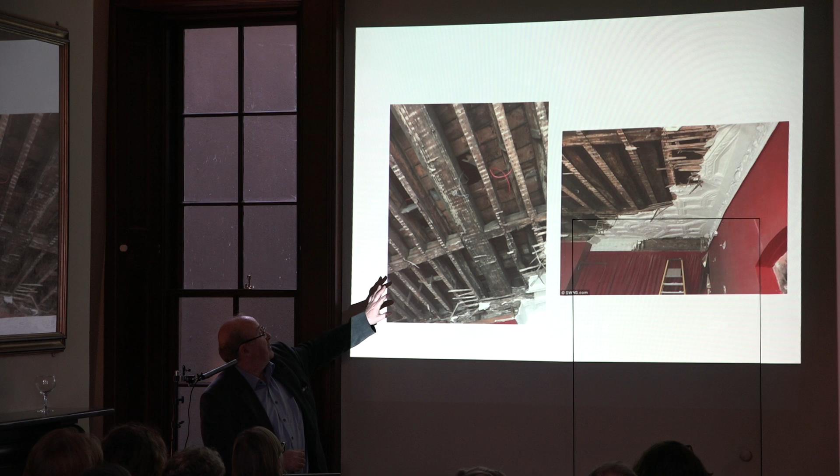But I just showed you the type of construction, which is on the slide on the left, which is what I'll be talking about, the major beams or breastsummers. The binder beams are, in this case you've got separate ceiling joists and floor joists, relating to the Dublin structures. Half timber. When did half timber begin and end? I didn't know. I have the answer now.

These are the last half-timbered structures to be built in Britain, and they were built in the 1650s in Newcastle. And there's a complete terrace. Even the houses with brick fronts were originally half-timbered as well, in Sandhill in Newcastle.

And the reason why they're half-timbered, and I finally got the article yesterday to look it up in Trinity electronically, is that the people who built them were all Puritans, and they regarded what Inigo Jones had been doing for the monarchs as royalist, and they were Puritans because Newcastle was tied with Cromwell. So when they redeveloped this area, and they were all members of the same Puritan sect, they redeveloped it as half-timbered houses. One of them is 1657.

This one on the right-hand side was restored by the later Viscount Gort, and in the 1930s he put all his own furniture into it, which is all now in Bunratty. He must have had a row with people in Newcastle subsequently. But anyway, if you look up that website, half-timbered houses, cagework house, Peter's already covered that.

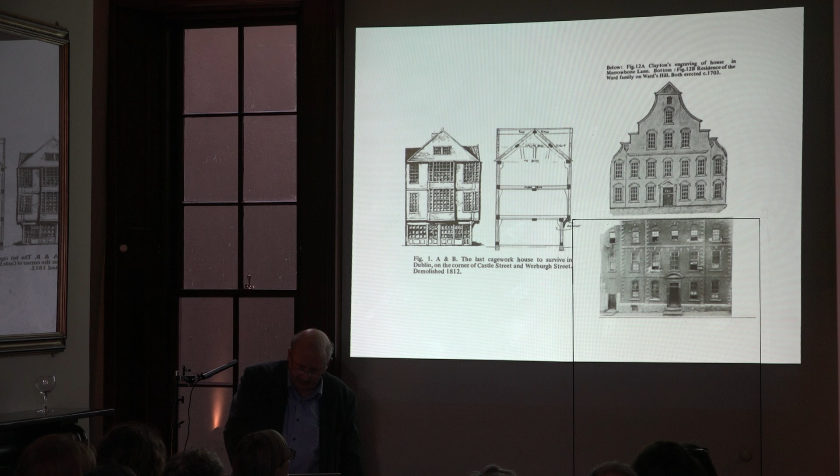Curvilinear gables, this is from Peter Walsh's book on the right-hand side. You had different types, one with a flat top, one with a curvilinear top, and then you had mansions. I think somebody showed one earlier, which was Lord Clancarty's mansion in College Green. This is one in Molesworth Street on the left, similar to what was Tervey House, with the gables filled in. So in other words, people were still, even wealthy people, putting gables on houses.

But on the other hand, there was a separate style in operation. On the left is Belvedere, now part of St Patrick's Training College, which I first visited with Geraldine Stout, who was here many years ago, and who got me into it. And it's 1680s, so it's obviously not in a gable style, it's the classical style. But the roof was changed in the 1720s and was probably more like the house on the right, which is Eltham Lodge of the 1660s outside London.

And these are the interiors, and this is the panelling of Belvedere, which is 17th century. I think it's the only complete 17th century panelling in Dublin, and you can see the beam. The most important house probably of the period was also the 1680s, and we don't know what it looked like. It was Speaker Conolly's house, which he bought, but we don't know who he bought it from. It was built in the 1680s.

It was replaced in the 1770s by a row of buildings, and one of them was demolished, and the only trace we could find, in fact, was an imprint of all the quoin stones on the adjoining building, which was built later.

On the right-hand side then, you can see the corner of Riders Row. When I was researching this in the 1990s, Mary Clark was able to produce deeds for houses in Capel Street and Riders Row, which were 1680, '88, and when we eventually got into those, with Leicester Roach, we discovered that they had 17th century interiors. Unfortunately, at that stage they'd got into a dangerous condition, and after we took the slides, these are Nessa's slides, the building went on fire one weekend and it was all lost. This is the only record of the interior.

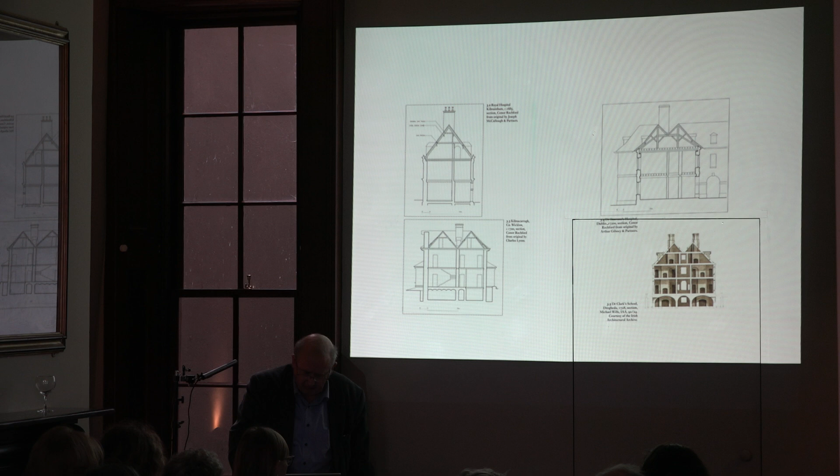Gabled houses. If you Google gabled houses, you don't find Dublin. Dutch gables. You Google Dutch gables in Wikipedia, this is what you get, which is Arras in France, which is a marvellous ensemble in two squares, damaged in the First World War. Interesting though, because this slide actually shows you, after shell fire, when the front walls collapse, you can actually see the construction. And the reason why the houses were this width, and presumably the reason why burgage plots were the width they are, is that is the width that an oak beam could span. And if you look on the right hand slide, you can actually see an enlargement of that with the beams, and you can see the mortises and the beams.

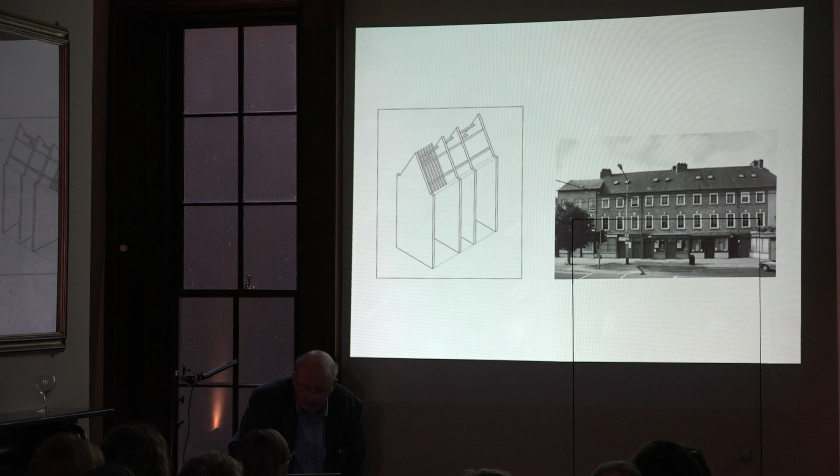Some of them, roof timbers had purlins. 18th century, the type of timbers you come in are more vertical timbers. But on the other hand, you have a combination. This is Lombardstown House, which burnt in 2012, which we were assured was 18th century, but yet there were beams of an earlier period, and you can see the 17th century house hidden behind it. And to go on to Aungier Street then, this is really the greatest concentration. We first registered number 21 in 1992. Subsequently, after UCD students had done a survey, they found more, and we registered those later on.

So there's 9, 10, 20, 19 and 20 and 21 are registered monuments. Peter's covered these already. These are, I think, early 18th century Aungier Street interventions. But then, this is important because the photo slide on the right, taken by Aidan Lumley of Aungier Street, sent to the OPW, where we were at the time, said that he'd taken this photograph of number 21, and it was the same as the Georgian Society earlier.

And on that basis, we both appealed the planning permission granted by DCC, respecting the building, to the board, and it was registered as a monument. So that was the first one to be registered. That's it on the left, as restored by Dublin Civic Trust. On the right, 19 to 20, which Richard McLaughlin is working on. Richard's given me some slides showing the construction. You can see the big beams and small joists.

9 and 9A, 10 and 10A, all registered in the 1990s. 9 and 9A was the subject of Tom's slides, and we'll come to that in a minute. On 10 and 10A, there was a lot of work done in the 1990s, and these are the backs, and I'll just show you a detail of 10 and 10A from slides I took 20 years ago, where it actually had a pair of pilasters, and this is just my scale on some of the cornice work, which was timber.

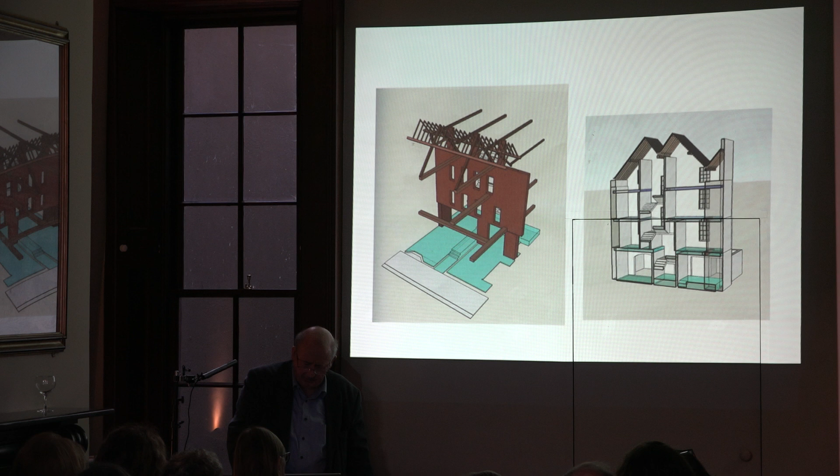And Tom's sections showing how these were brick buildings built really like what Inigo Jones was doing in the 1630s. In other words, this is after the restoration in 1660. When people started rebuilding both in London and Dublin, they wanted to go back to what they were doing in the 1630s and build uniform linear streets with gables with ridges parallel to the street. So this is why Aungier Street is not a gabled street. It's going back to a street pattern which had been started by Jones before Cromwell's time.

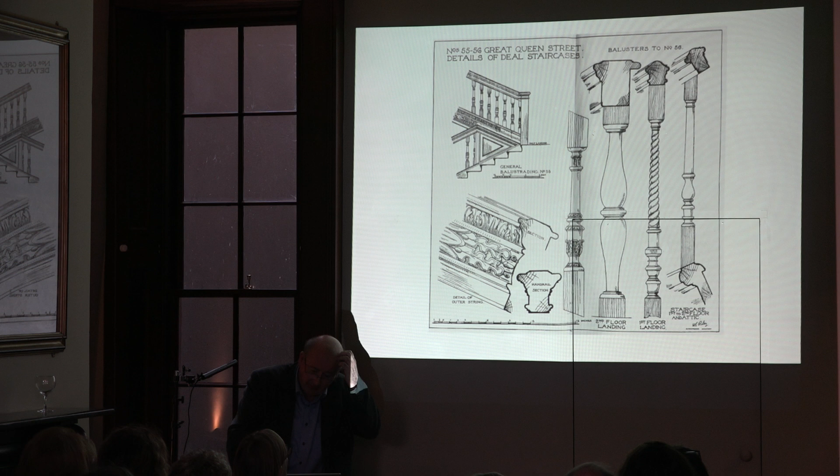Thank you, Freddie. That was amazing. Bang on the button. Our next speaker is David Averill. He is a director at Sheehan & Barry Architects, Grade 1 Conservation Architects. And he has been working with Sheehan and Barry since late 1986. He's worked on a number of significant conservation projects such as Newman House, 85, 86 St Stephen's Green, Dublin 2, Giltown Stud, County Kildare, 8 Stephen's Green, 58 Merrion Square, Rusborough House in County Wicklow, Lambay Island, and numerous other large and small projects during his time at Sheehan & Barry.

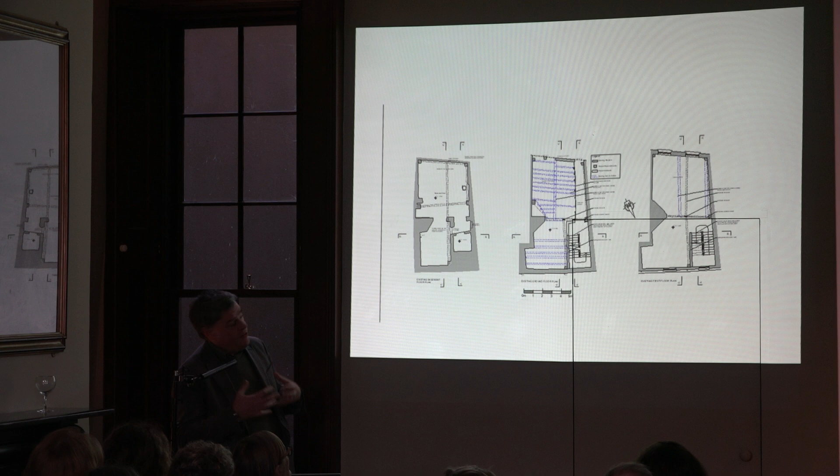So our first job was really to try and make the building safe. Initially Paul engaged his regular engineer, Robert McGrath from Pat O'Gorman and Associates. Robert went in with a view to try and stabilise the building and prop it. He did that by evolving a system of propping that Paul could use safely and make the building safe, which allowed us to go in.

It started off with my colleague Shane O'Connor and myself going in to survey all the joinery. The blue is the surviving timbers that we identified as we went up the building. There was more surviving on the ground floor. There were layers and layers of detritus. The building had been used as a kind of fly tip from above by neighbouring properties.

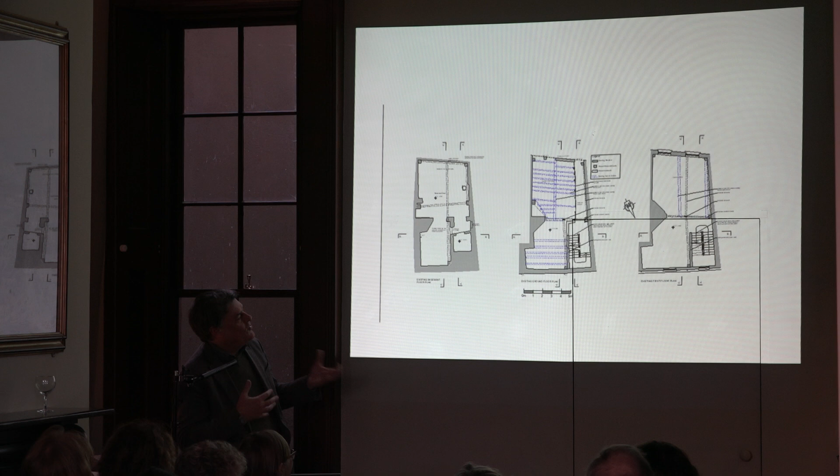So we had mattresses, and then a lot of the actual areas of interest were hidden behind beauty board. The building had been a shop, and everything was covered in beauty board. Beauty board is the least beautiful thing that you can find. But anyway, Paul carefully stripped that away, and it allowed us to make those assessments.

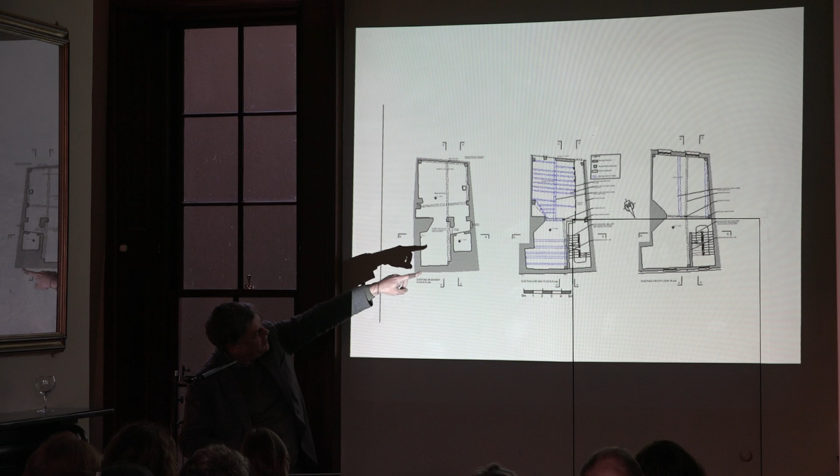As you can see, it's an interesting plan. This is the ground floor here, where the shop was, at basement level, and then that's at the entry level there. The corner fireplace had been lost at the front, but it was essentially your typical corner fireplace, two-room with a staircase, and then an interesting roof form.

It had a kind of a roof and a half at the back, and we quickly could identify by looking at the top floor that it probably was a dormered building originally, with an extra floor added and a parapet put in, because we could see the remnants of the pathway of the old roof.

So now the roof had been replaced. The very derelict roof you saw in the earlier slide had been replaced. It was all modern cut timbers. It was severely deteriorated, so it wasn't a difficult decision to remove it, but to reinstate it as found. In a sense, we rebuilt the form as found, but with a modern roof.

What Paul was able to do then was to support the building, and Robert and we had to look at what we were dealing with. So it was a kind of structural strategy that we had to adapt and come up with. And I would say that every building that you meet is going to tell a different story, and it's going to suggest different things to you.

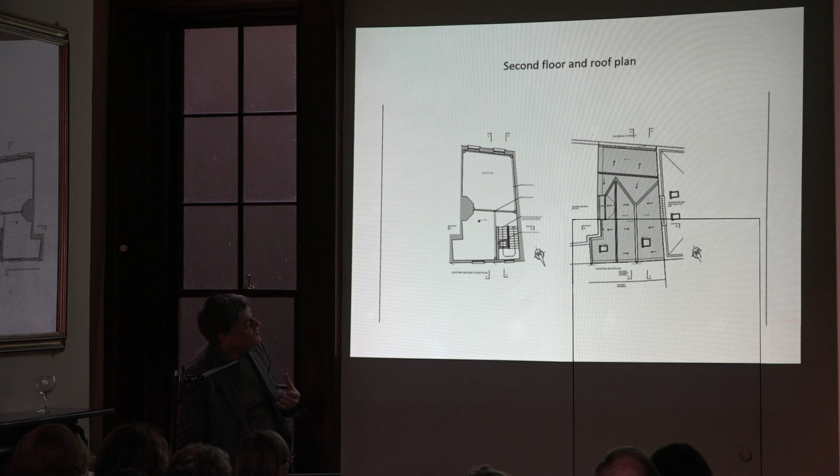This house had gone so far structurally that there was very little viability in any of the structural elements, the floors, the joists, the walls. So we had to make a decision: how do we bring this building forward in a way that keeps as much original material as possible? So Robert came up with a very simple system of basically a steel frame that would be inserted into the building, which would allow the building to be supported and allow us the time then to assess what we were dealing with.

So it was an approach that we would build a semi-permanent steel frame. The steel frame was more complex at the start. It had struts which were designed to be removed as the building became more stable, but we were still working on the basis that we would build a permanent steel frame, because the level of fragility of the surviving fabric was such that if we started to dismantle it, and some of it had already collapsed, we were going to be involved essentially in a reconstruction, which was going to lose some of the essence of the building as it was. So the steel frame gave us the flexibility to retain as much original material as possible.

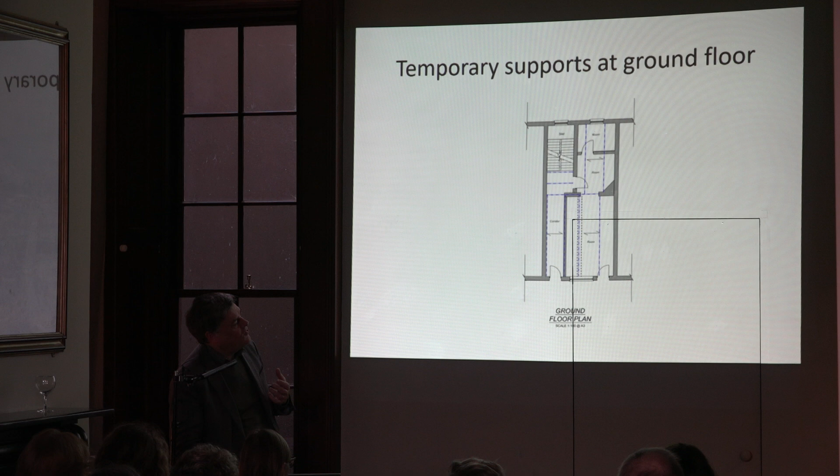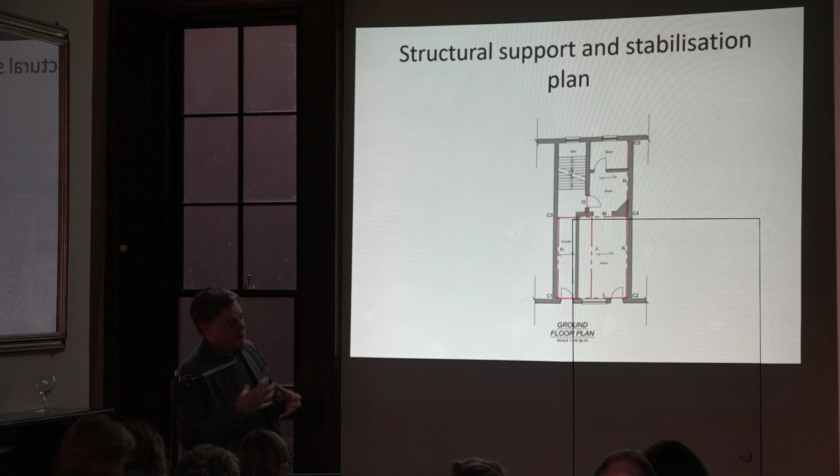That is the ground floor plan. There was a partition across the back, but actually it was modern. And there was a funny little nook, which doesn't show on that plan, that went into the neighbouring building. We were able to find from blocked up openings that ownership had changed over the years, and this building had been part of neighbouring buildings and connected to them, then blocked up again and then opened up again. So periods of different ownership had provided for a different kind of connectivity between its neighbours.

So this is where we were on the ground floor once the steel frame design was worked out. I have to say that all along this process we were very much working with the City Council, with Nicky's support and Carl Raftery and everybody else in the City Council. It was a collaborative journey, and doing this kind of project is incredibly collaborative, as I'm sure all of you know. You end up working with so many different people who are bringing so many different skills to the table.

Paul was a brilliant client, and I think it's so important that you have a client who's sympathetic to the building. Paul came from a joinery background before he was a main contractor, so he was very interested in the joinery of the building. And he was able to say, I know what I'm dealing with now, and to give us the space with the support of the council. The council was very supportive in encouraging us to go for specific grant aid as well, and that gave Paul a little bit of room financially to allow the building the time to be explored and developed in an appropriate way.

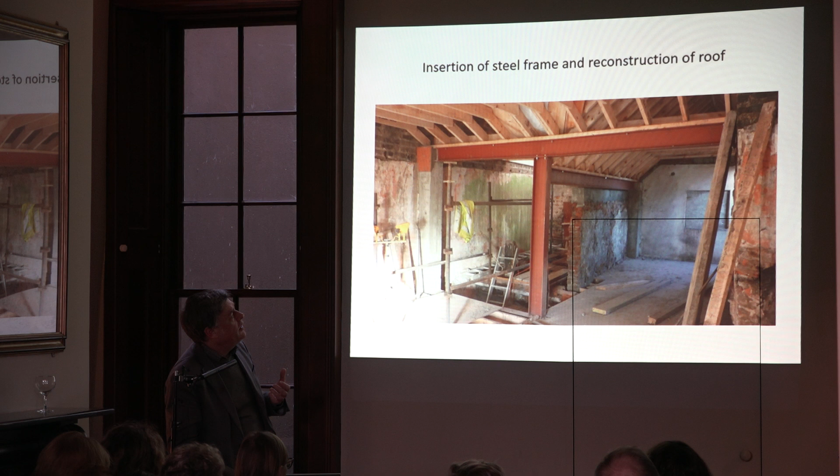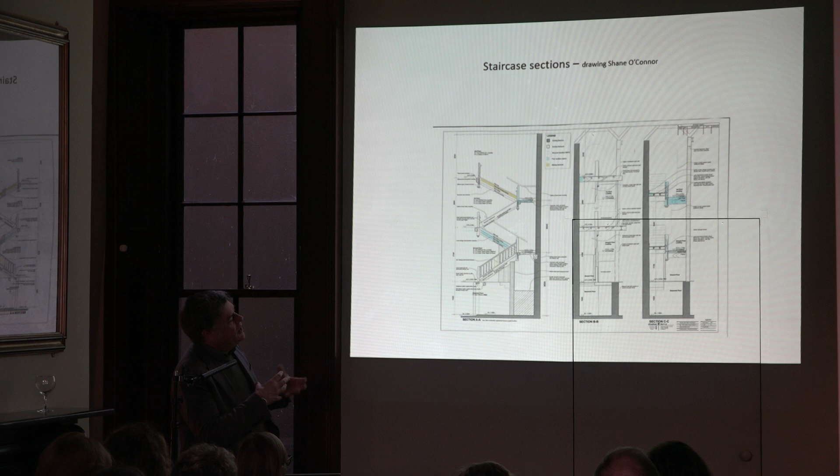So we did sections through the staircase. We categorized what was original, what was lost, and that was a very interesting process, just looking at what we had, and then working with a specialist joiner, Pat Lynch from McGlynn Joinery, who Paul had worked with before, and then starting to develop a strategy for restoration of the staircase in a way that was going to bring back the character of the staircase.

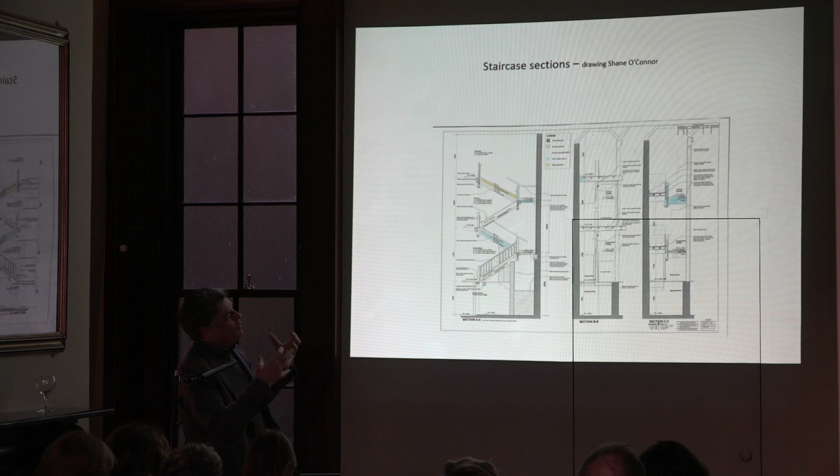See how I'm doing. So there we were in a situation which was unusual in that all the non-viable structural elements had deflected and settled. So we were able to put in a new floor which was actually to the correct level, but the surviving elements had deflected so much that there was no possibility that we were going to be able to reuse them anyway. The joist ends had rotted quite badly in most cases, but everything was recorded very carefully, and then we were able, once the floor above had been inserted, to place the timbers back from recording exactly where they had been found.

This was a point where Robert stood back from the project because he was moving from one practice to another, so it was an opportunity when we worked with Lisa Eden, and we knew Lisa's work in Aungier Street and her particular experience and skills with buildings of this period.

So we were able to engage with Lisa, who was a fantastic partner on the project and somebody who has such knowledge and appropriate sympathy for a building of this period. So we were able then to evolve ways and strategies that the surviving timbers could be presented in such a way that they were seen as found, and if they were stabilised and presented, they were presented in a clean, clear way. And you'll see in some of the later slides that Lisa evolved very simple ways of just hanging

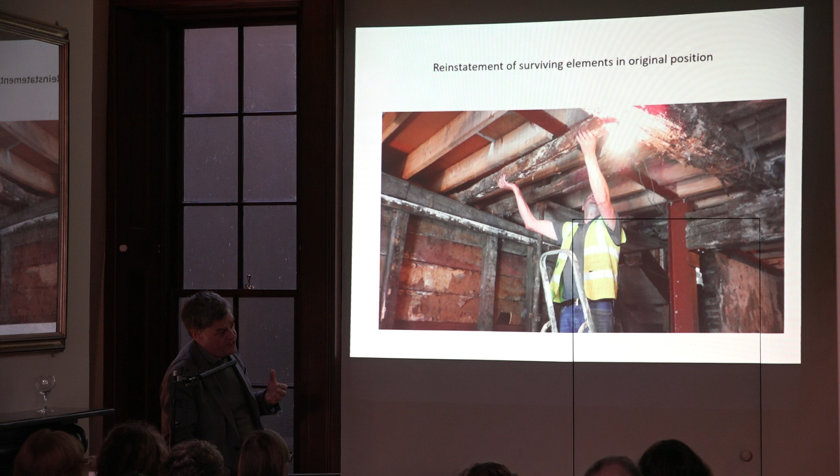separation and compliance. But what we did introduce was fire separation between the ground and first floors, for which we used the Lamatherm system, which is a very simple system for inserting between joists. And it gives you the flexibility to work with separating floors in a way that respects and can maintain as much fabric as possible. So this is Lisa's very simple approach to where we had surviving timbers, that they were just essentially presented and held in position in a very simple and clean way. And then you can see the new floor went in then above the deflected original floor.

We had a very interesting combination of brickwork that surrounded the staircase. And we were fortunate to get advice from Susan Rowntree, who came to the site and met with my colleague Shane O'Connor and started to identify the layers and cumulative changes to the building, identifying the fact that there was early brickwork. The thinner early bricks were concentrated in the party walls. And as you went up the building, you began to see more intervention from later rebuilds, later larger bricks being evident.

So here we are surveying the staircase, marking with chalk every single element of the staircase. And one of the big surprises we discovered was at the front, the riser was a kind of a moulded riser. And that was a very interesting thing because buildings of this age had a certain architectural ambition, even though they were quite modest buildings. But we were able to correlate these buildings with other buildings where timber staircases aped the architectural detailing of stone staircases. And we were able to even discover a 17th century hammerhead hidden behind one of the

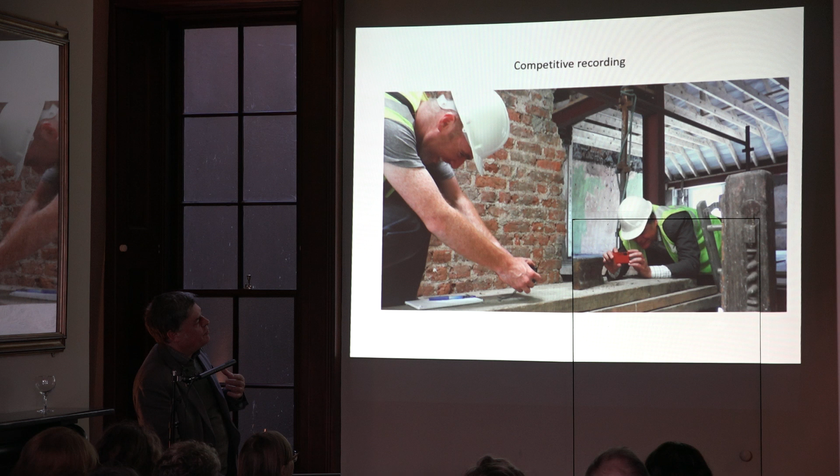It's what we call competitive recording. That was Lisa Eden taking a picture of Shane and myself. Shane and then my other colleague, Niamh Kiernan, came on board after Shane went back to Waterford, where he was from, and we worked together on the project, and I think it was a very useful and interesting collaboration.

Here we were testing the cleaning process for the timber. What we wanted to do was just basically to do a very light surface clean using chalk and looking at different densities and different levels of cleaning to try and establish the best and most appropriate way of taking away the surface dirt, but essentially consolidating and leaving what we found as much as possible.

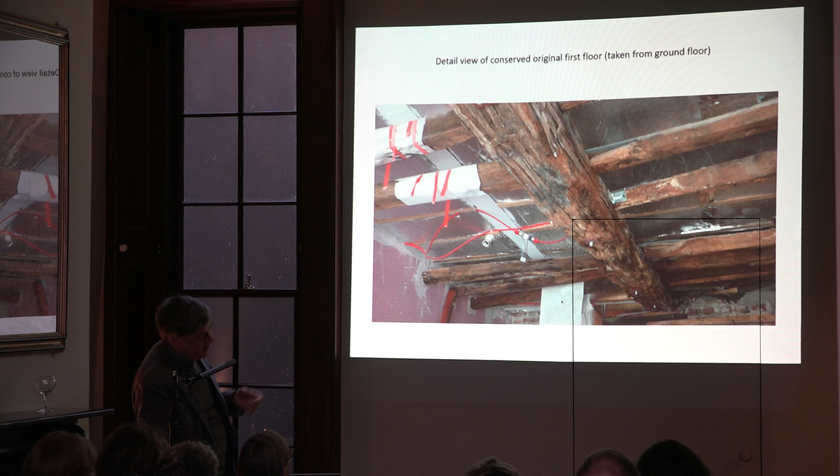You can see the Lamatherm system has been inserted. Again, we were lucky that Declan Crilly of FEAC had a very good relationship with the fire officer. So he was able to negotiate a very sympathetic approach in terms of fire treatment.

Here's Pat's work in reinstating the treads on the staircase, and where it was lost, he remolded the molded frontispiece to the riser. And then here we are further up the building where Pat had inserted new balusters and new handrails. The newel posts had survived, very simple, chunky newel posts with little mouldings top and bottom, possibly a little altered a bit later, but surviving. And then it enabled us to reinstate the entire staircase from ground to top floor.

We used a Canadian pine, which we established was probably the best. But what was interesting from the dendrochronological information was that there was a variety of timbers. There was oak as well as pine used in the building. But the testing allowed us to consolidate a date towards 1640. The majority of the tests suggested a date for the staircase of 1640, although we did find a 15th century timber there as well. So again, it speaks to the fact that timbers were reused, and there was a bit of creative reuse going on then in terms of sustainability in its 17th century form.

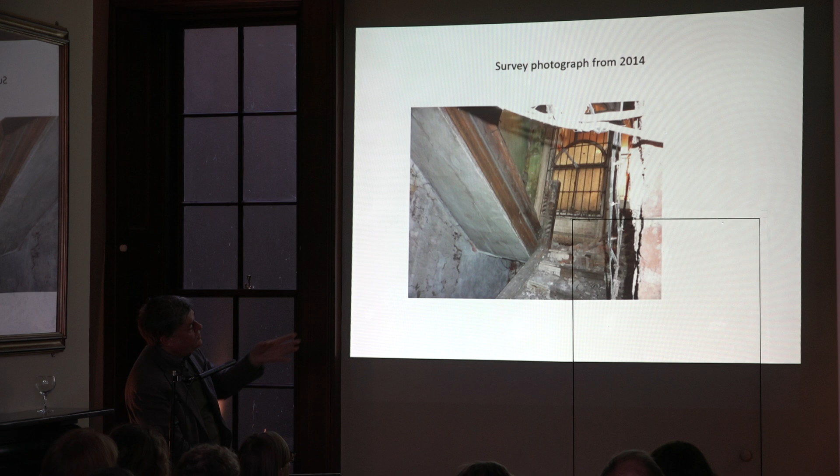Here we are again. This is the most intact original section. We only had to reinstate one missing baluster. So then the building found a new life. This is the view of the staircase. There was a sort of early 19th century treatment of the half landing window, but most of the staircase had been lost, and this is after the reinstatement work.

Lisa did great work in stabilizing the staircase and allowing the maximum reuse of the original structure. But obviously it was in a perilous condition, and Lisa's work was very valuable in terms of designing a way of treating it. This is the entry corridor with the planked partition reinstated, but obviously we had to insert a fire wall between that and the new shop to provide for fire separation.

And then this is the interior of the apartment on the first floor. There's Paul's little display cabinet for the artifacts found on the site. We've got some very nice old salvage boards for the floors, and you can see the corner fireplace. We've exposed the principal timbers, and I think the building has been allowed to have a viable function.

This is an exposed section of the staircase brickwork. As you can see, a variety of repairs, a variety of shapes and sizes. Quite a crude level of construction, but a fascinating accumulation. And here's another view, this time on the top floor. Again, trying to leave remnants of the structure and heritage of the building exposed for the owners to enjoy. And little remnants exposed in the building.

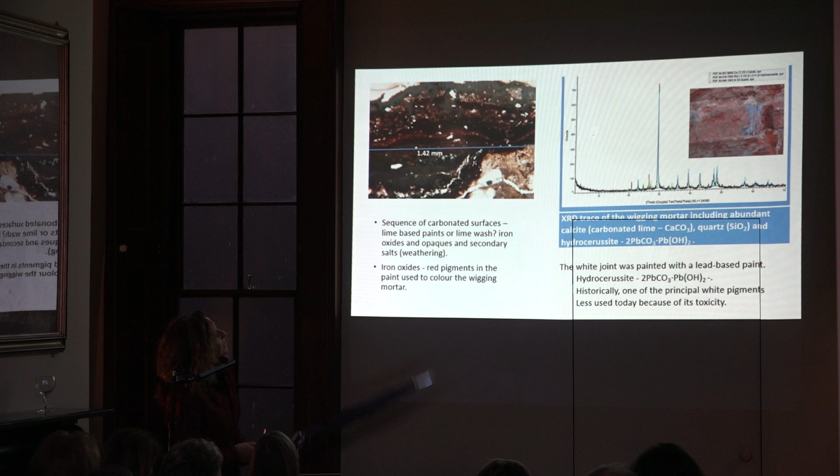So what else did we find in the wigging? Oh yeah, there was a sequence of surfaces, in some places at least 3, and they were just carbonated surfaces. I don't know whether they were lime-based paints or maybe lime washes. What was clear is that the wigging mortars were painted with some iron-based paint. So there were a lot of oxides.

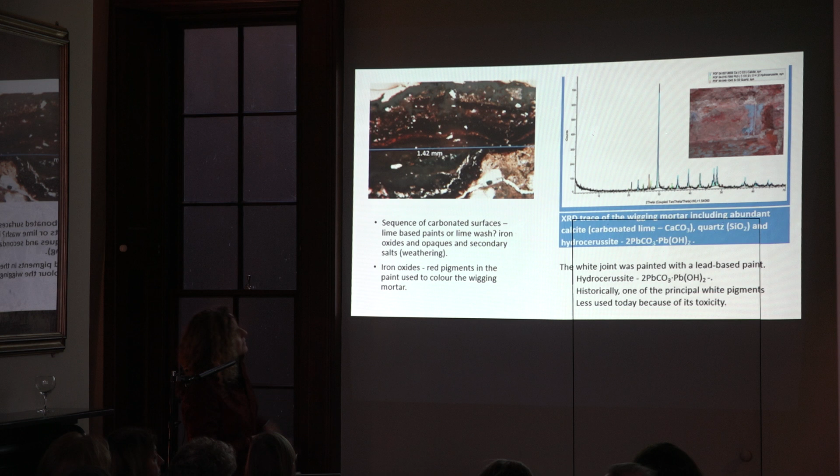You can see the red, and if you look at even a higher magnification, there were a lot of crystals of oxides on these coatings.

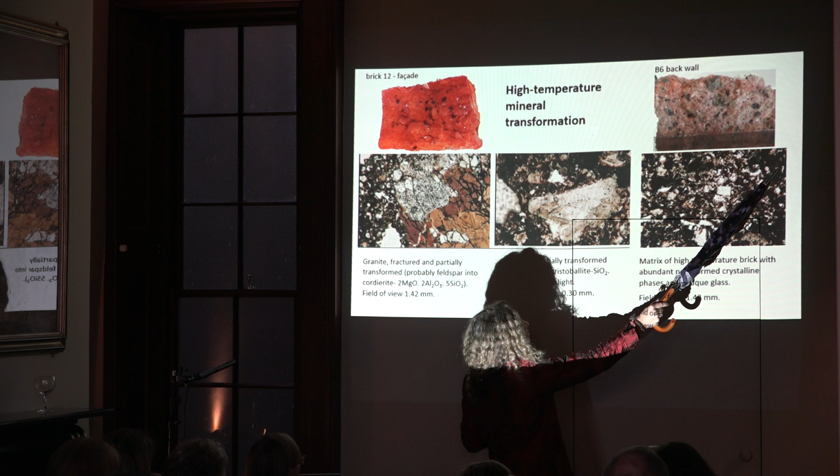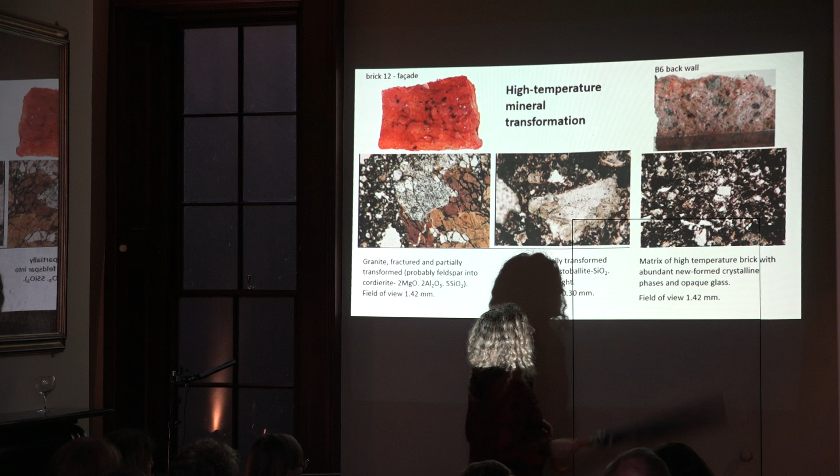So in these high temperature bricks, the matrices were typically very black. All this black stuff is glass. It has no crystalline structure, so in the microscope it looks completely black. And also some newly formed crystals. All these wiggly crystals, wiggly phases, were newly formed during firing. So that was a typical matrix of some of these high temperature bricks.

At lower magnification, you could see that alternation: areas of opaque glass alternating with less glassy areas, with more new formation. You could see the fragments of limestone sometimes, some other times granites or sandstones in there, residual. And we could see that micas were breaking down and being transformed into glass, meaning that the temperature has to be more than 1050 degrees Celsius for the micas to break down like that.

The petrographic microscope will give us two-dimensional pictures of the material at not very high magnifications. You can see the scales in the previous pictures. But the SEM, scanning electron microscope, will give us a three-dimensional black and white picture at much higher magnification. But really what we could see was very much the same thing as with the petrographic microscope. Only we could see the glass much better, and we could take the composition of the glass.

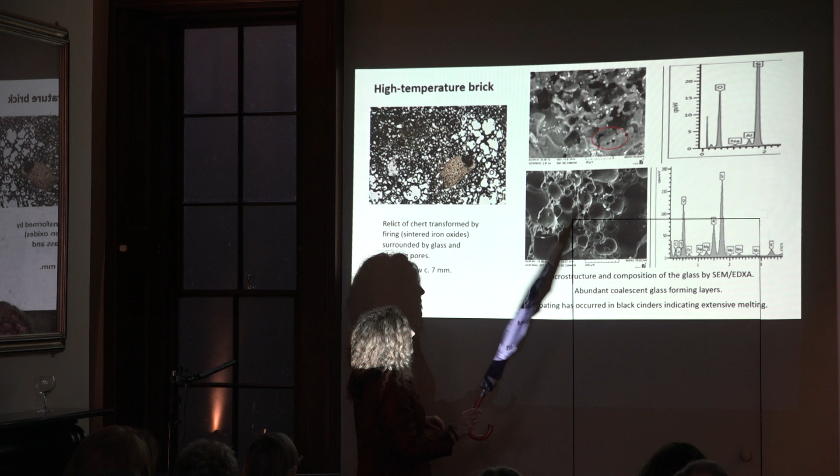So we have transitions between areas with discontinuous glass and very little new formation, into other areas where we have glass completely covering all the material. And the highest temperature was reached by areas that look like coalescent glass with bloating pores. Bloating pores indicate extensive melting, because a bloating pore is like when you boil water and the bubbles. So imagine that you are boiling a solid and you have the bubbles that the melt will leave. So we could find that in the cinders, in the areas near the black core, in all these areas.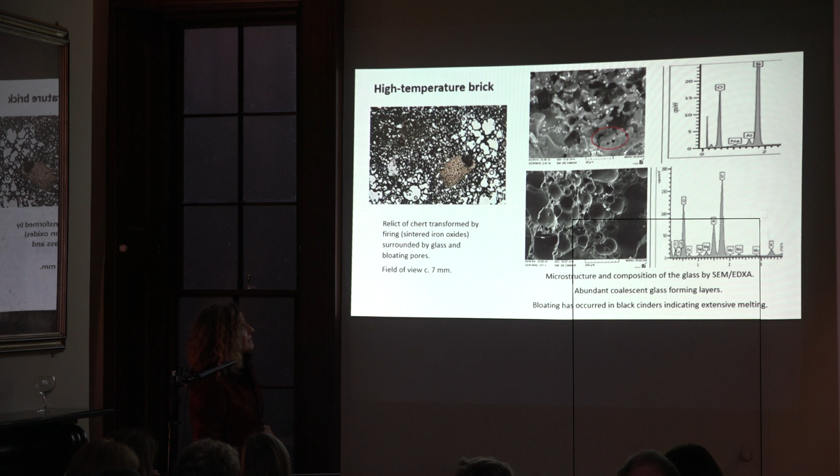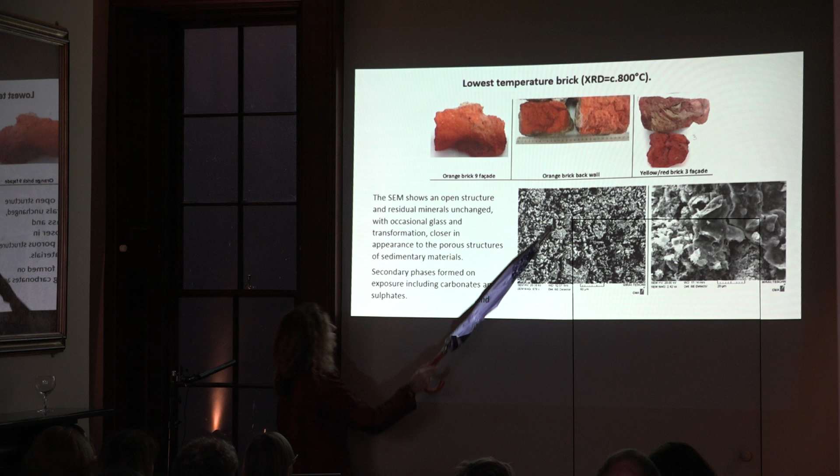A picture of one of these highest temperature areas under the petrographic microscope will look like that, with the bloating pores, a lot of glass and some relics of sedimentary material, with a lot of transformation. So the lowest temperature bricks, the ones that reached less temperature, the microscope will show an open structure, completely different, with only occasional glass and a lot of pores and many grains that look more like sedimentary materials. And also secondary phases, sulfates and some carbonates that I'm not sure whether they were secondary, and sometimes relics of the original sediments.

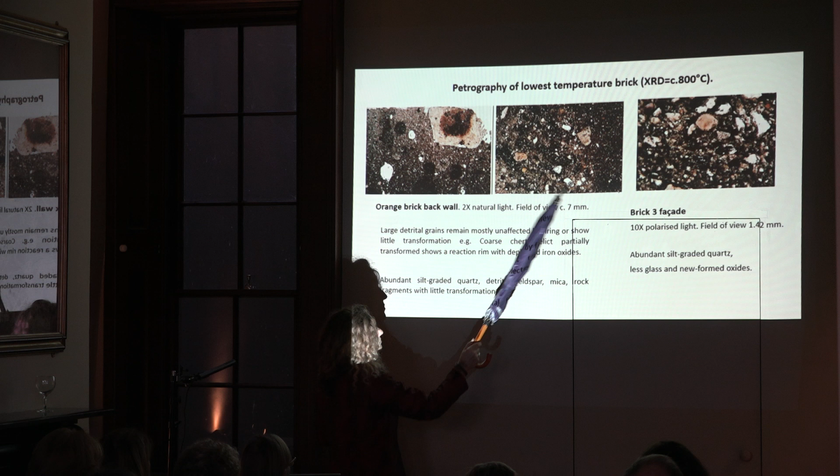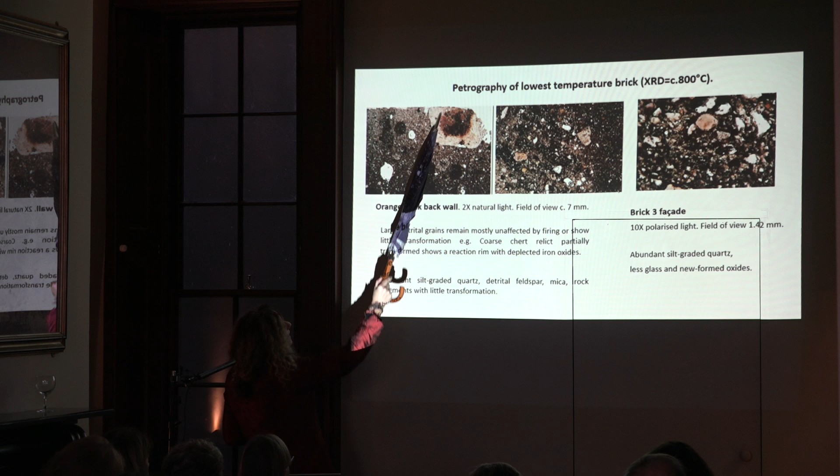So with the petrographic microscope you find the same type of reaction. You'll find large grains from the original sediment that was used to make the bricks, and some silt-graded and sand-graded minerals and rock fragments. Some of them will show some reaction. For example, this is a large chert, which is typical, as you know, of the calp limestone. In the Dublin area we find a lot of chert. It's microcrystalline silica, where you see that there is a reaction rim. All the oxides have been depleted from this rim and have formed inside. So this indicates a certain amount of transformation, a certain temperature, but you can still see the abundant silt-graded quartz, the abundant sand, and some glass, but not very linked in different layers.

So conclusions. With respect to the mortars, all the mortars, I think, were mainly lime-based, but contained gypsum. Gypsum, as I said, is a calcium sulfate. As you've seen, the aggregate was very different, so the three mortars were very different. It is very unusual to find gypsum in exterior masonry in Ireland, because gypsum is hygroscopic. It absorbs ambient humidity and is quite soluble in water. For example, we can dissolve 2,000 milligrams per liter of calcium sulfate in water, whereas we can only dissolve 80 milligrams of calcium carbonate, at ambient temperature. So a mix of very hygroscopic, taking and releasing water, and quite soluble. So it wasn't really used in Ireland.

That's what I thought. Obviously, I wasn't right, because these were used originally and they were not protected. Otherwise, the wigging wouldn't have been there. The wigging was obviously on show on the facade, so they were not even rendered for protection. And yet they are there and they have survived; they've done their function. They are now sometimes detached, but they are still quite healthy, I would say.

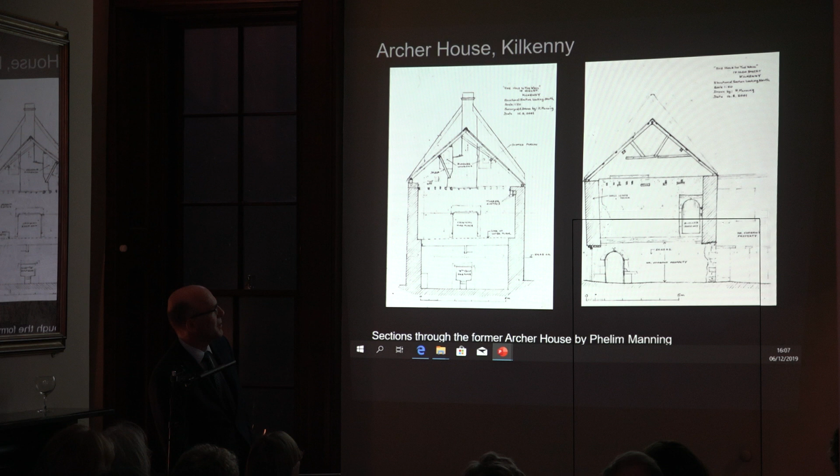My work in Dublin has brought me into contact with early 18th century buildings. I worked on a pair of houses in Montpelier Hill, badly fire damaged, badly damaged in a whole heap of ways, but corner fireplaces, the downstand beams supporting the floor joists, all characteristic of early 18th century house building. And interestingly, although I don't have it in this slide, relative to Niall Crimmon's presentation in the morning, this building had a panelled timber wall which was structurally supporting the staircase.

So looking, I suppose, over the course of my career, I've been very aware that one needs to be looking out for these clues, and if something strikes you as being not quite right, you have to follow your instinct and begin to explore and get to the bottom of it, because all is not always as it seems. So that's the introduction and the preamble.

Moving on to the first of the two buildings, which is the Everard Alms House in Fethard, which was constructed in 1610. And this appeared earlier in Valerie Mulvin's slide very briefly as the fire station. It was constructed as an almshouse by the Everards, who were a very wealthy family within the walled town of Fethard. It subsequently, in the 18th century, became the town hall, therefore locally known as the Tholsel. Then it became a market house, then it became a fire station, and more recently it's become a museum, which we'll get to in a minute.

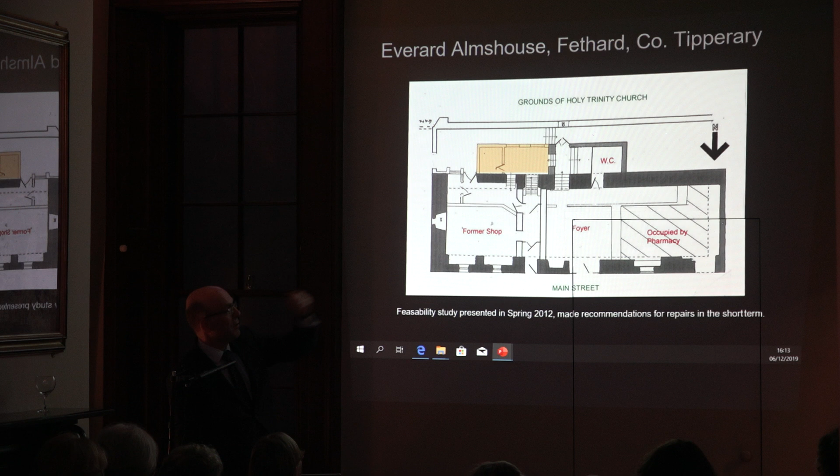So the feasibility study recommended some essential repairs, removal of a 1950s toilet block, which was causing dry rot and water ingress, which is the yellow rectangle. And then some very basic parameters for redevelopment. The key one being this green route through that you could go 6 steps, which is the length of an oak beam, 6 very long steps maybe, but through the building, and you get presented with the view of the walled townscape to the rear. And that was very, very important, maintaining that view. And I fought hard over the course of the project on that front.

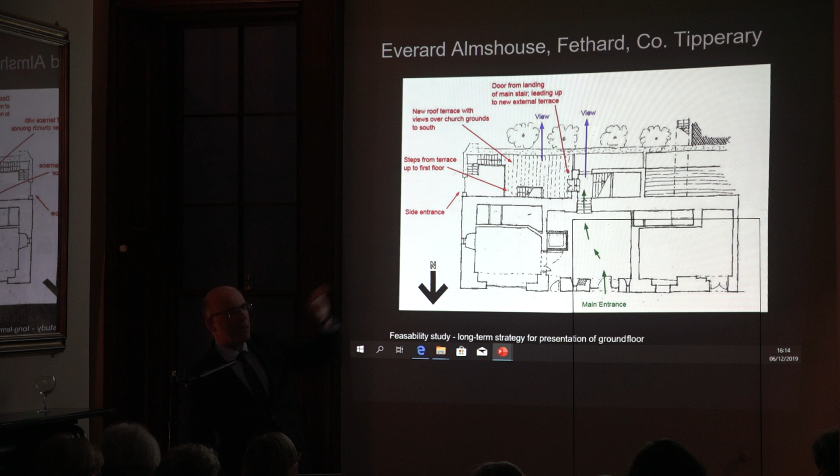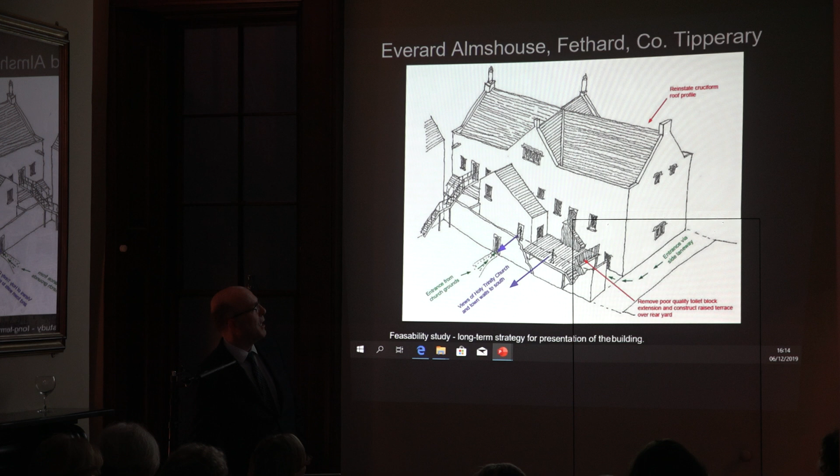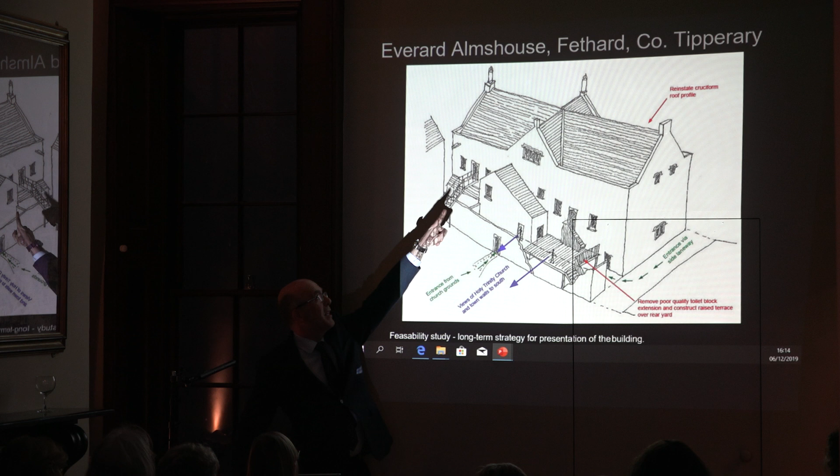And then there was an opportunity to perhaps get a terrace in to allow an external outdoor view across into the grounds of Holy Trinity Church. So these were very, very rudimentary sketches that I did at the outset in the feasibility report. And I was also suggesting that there must have been a gable at the back if there was a gable at the front, and that's what that little slide was about. That gable didn't exist at the time.

I lost contact with the project for a while, and planning was achieved, and a shout out for Gráinne Shaffrey, who handled that element of the project. And then suddenly, by a circuitous route, I came back in again through the joys of public procurement. And the first stage was to begin to refurbish the main building, which involved a certain amount of strip out. And I was fairly sure we would find something on this gable wall, and sure enough, out came the early 17th century fireplace.